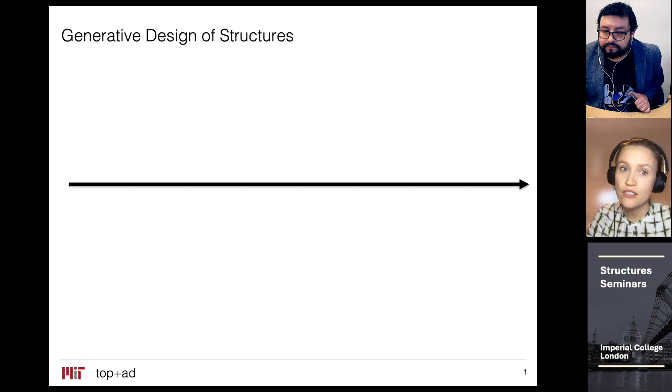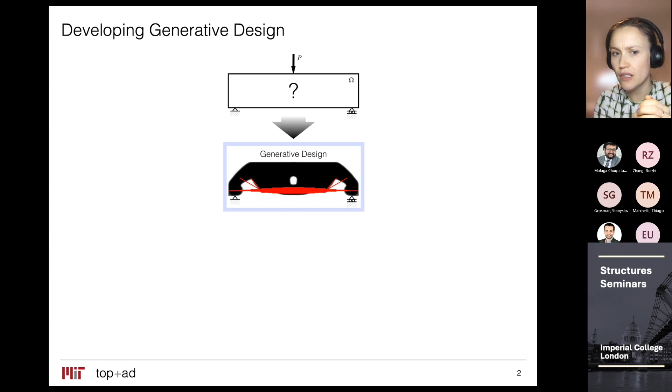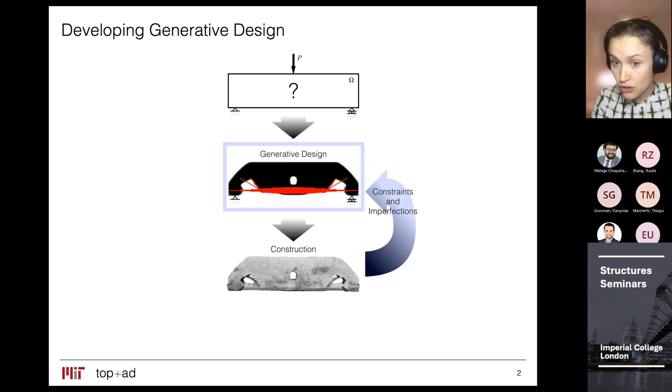In order for this really to work, the blue box needs to know what happens when we take the design out of the computer. So what are the constraints and imperfections that arise when we are fabricating or constructing our structures? Is the generative design algorithm aware of it? If not, then we need to make it aware of it. And likewise, when we test our structures, what are the governing physical behaviors that we observe, and were these captured properly by the design framework?

So this is an overview of everything we do, and totally a spoiler for the rest of the talk, because this is the stuff I'm going to be talking about. But before I dive super deep into what I mean by generative design, and all the stuff that we put into this blue box, I'd like to take a step back and talk a little bit about structural optimization, because that's what we in our group use as the driver in this blue box.

So let's pretend that we're all structural engineers and that we've been tasked with building a new building. Could be on the Imperial campus, could be on MIT campus - there's lots of building going on there for sure. And we don't want this building to be the heaviest building to ever see the light of day. We'd like to optimize it a little bit.

There are a couple of ways we could go around doing that. The first way would be to use what's called informal optimization, which means that we use our past experience, some rules of thumb, and maybe some heuristic guidelines. All of this sort of lets our design decisions be guided towards something that is better than where we started. Alternatively, we can use a formal optimization technique, where we'll pose our design problem as a formal mathematical optimization problem, and use rigorous mathematical optimizers to solve it.

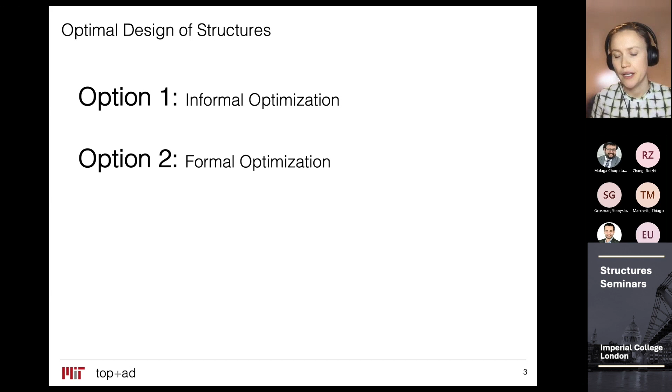If we decide to go with option 2, then we'll have three categories to pick from, being sizing, shape, and topology optimization.

I'm going to be talking mostly today about topology optimization, but before I do that, I'll just touch on what these three things are and how they relate to each other.

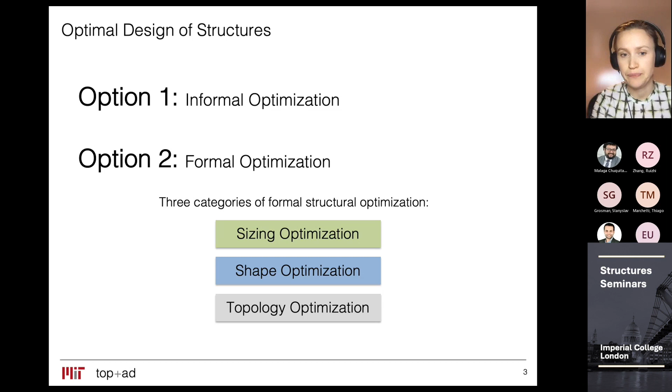So for our new building on Imperial campus, we've chosen that the girders have to be made by these truss beams, and we'd like to use sizing optimization to help us design these beams. What we'll do is choose a connectivity, put that into the computer, and the optimizer will optimize the areas of the truss and give us our design. What the optimizer cannot do for us is tell us where it's best to start.

And as you are probably all aware from the case of trusses, there are many good places to start. To figure out what is going to be the best truss for our application, we would have to try out all these different starting points.

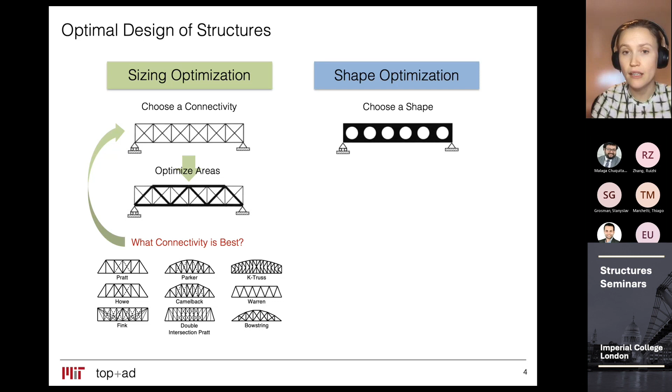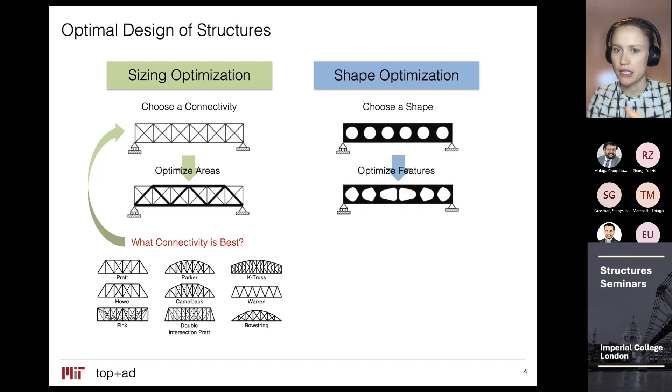And shape optimization is similar. If we were to make a low weight beam by punching some sort of shaped holes in it instead, we could choose a shape, optimize the features, so make the holes in different shapes. But what shape optimization cannot do is tell us what number of holes is the best one to start with. It cannot add a 7th hole, even if that is what makes all the difference in the world. And it can't add lots of holes either.

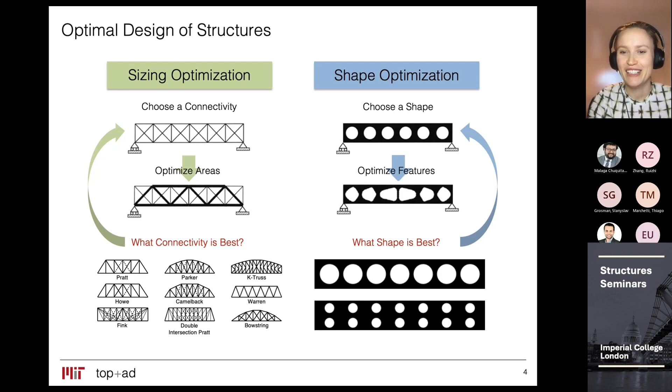Topology optimization is different in that it does not rely on this starting guess, this starting intuition of where I'm going. All you really need to know is the boundary conditions and the loads applied on your structure. Then you give this to the optimizer and ask it, where do I place material? And out comes this new design.

Topology optimization has been quite popular in the automotive and aerospace industries because it's known to lead to new and perhaps surprising design solutions that often outperform conventional low-weight design quite significantly. So in this case here, we can get a 42% stiffer beam with the same weight.

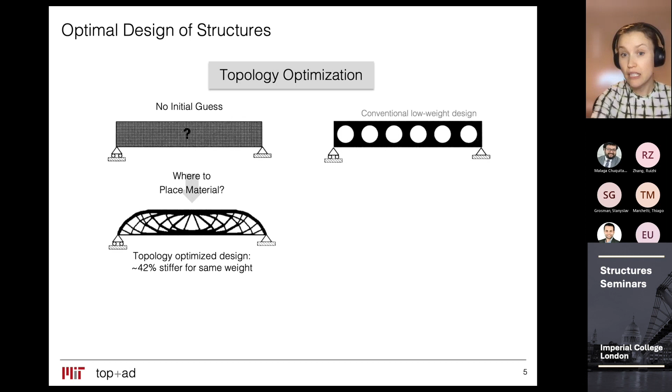And if we were to ask the question differently, how low can we go? We can get an almost 50% lighter beam with the same elastic stiffness. I don't know if this is a lunchtime seminar, but there is no such thing as a free lunch, and not in this case either.

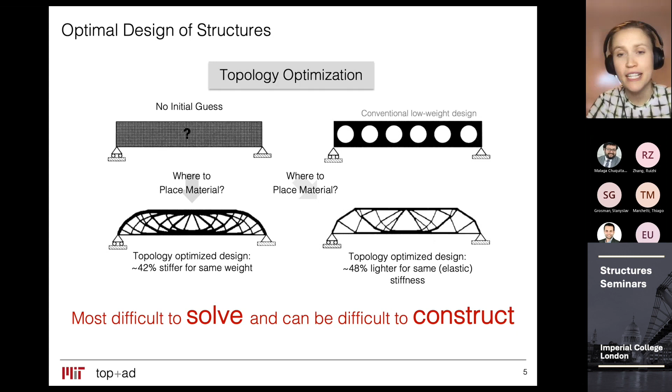This is by far the most difficult category of structural optimization to solve. And we are left with these great looking fancy structures, but also the head scratching question of how do we actually fabricate or construct them. I'll talk a lot more about that.

But before I dive into the headaches, I'll just give you a little bit of a flavor of how topology optimization works.

So we're going to be designing this cantilever beam where we have a point load at the mid of the end of the span. It has some dimensions, a height and a length. And we're going to set up the design problem as this formal mathematical optimization problem, where we are going to be minimizing the structural compliance, which in this case is equivalent to maximizing the stiffness.

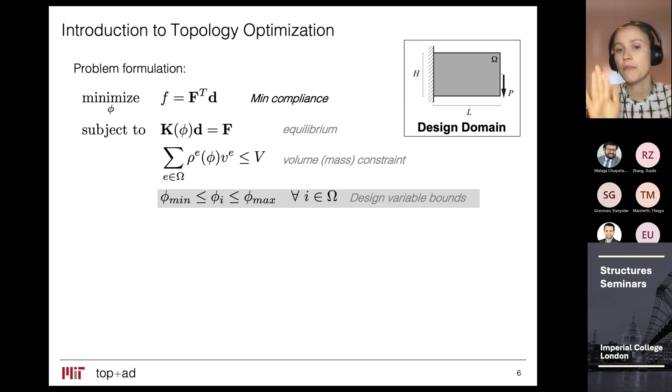We're going to be enforcing a structural equilibrium. You may recall this equation from your finite element analysis. And we're going to impose a volume or a mass constraint, so we're going to tell the computer how much material can you use. And then we have to set some bounds on what the design variable values can be.

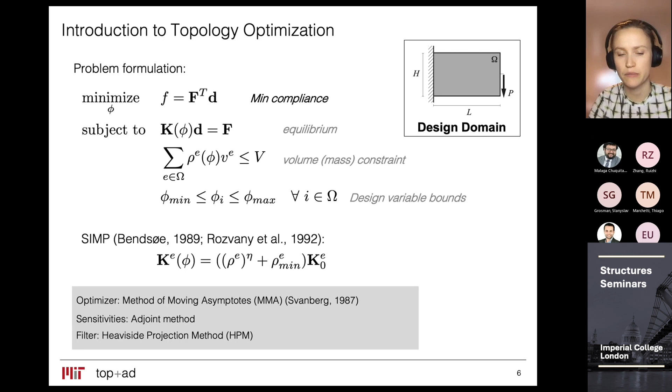Just some algorithmic details, don't worry if you don't appreciate them. We're using SIMP to penalize intermediate densities. We're using the method of moving asymptotes in most of what I'm going to be talking about today as the gradient-based optimizer. We're calculating sensitivities using the adjoint method. And then you have to do some filtering to avoid numerical instabilities. We're using the Heaviside projection method. This is something I'm going to be talking a bit more about later on.

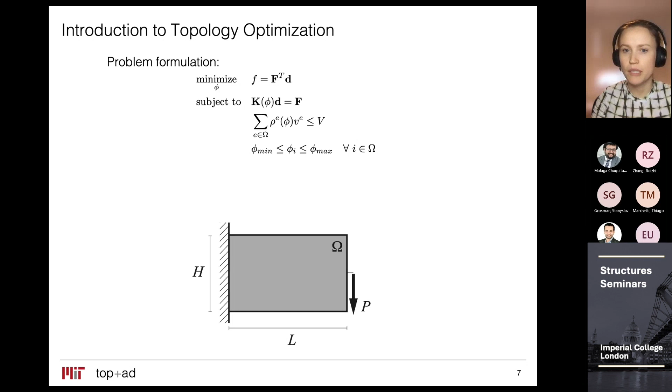With that all squared off, what we're going to see now is how a design evolves from this gray, like I don't really have a clue of what I'm doing, material solution to a discrete 0-1 material or not material design. And this happens as the design is generated.

Now, in setting up this problem, I'd made one more engineering decision. I had decided that this particular design would be well represented by 2D continuum elements. I could have picked something else.

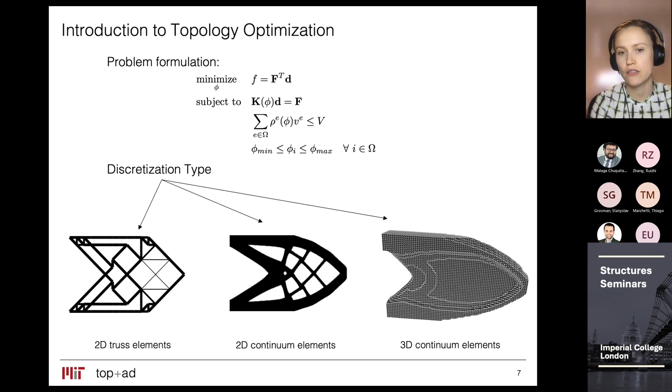I could have said that a truss discretization would be more suitable, or 3D continuum elements was really relevant to my design. I think you can see that I'm getting structures that look sort of similar, but are confined to whatever resolution I'm giving the computer to work with. The methodology and everything that goes on in between is largely the same. This is like a user specification that you put on when you set up your problem.

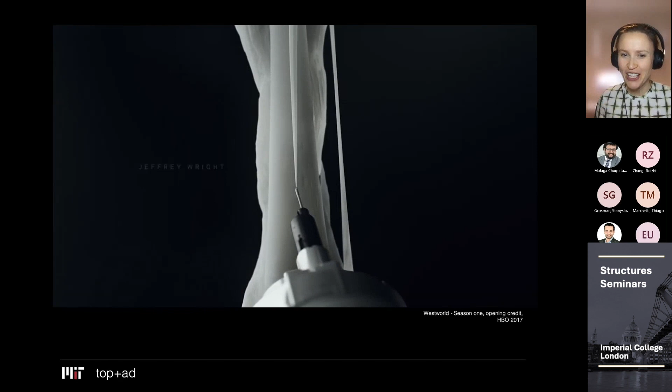So why am I boring you with all this? Why am I so keen about using this fancy generative design method when I've already said that making stuff is going to be a headache? I realized that using this clip already is dated. What I'm showing to illustrate...

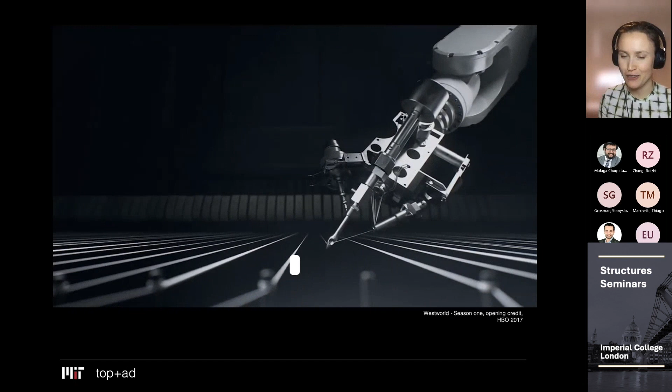...that things are really moving in the manufacturing industry is this opening credit from the HBO science fiction series Westworld. And in this opening credit, robotic extrusion is being used to print humanoid robots.

Now that is still science fiction, but this here is what's going on in research labs across the world today. Robotic spatial extrusion is being used to print. All of these examples are plastic structures. There are actually also steel examples now. One thing you'll notice in all of these images is that a lot of the designs are based on having this regular lattice that is then morphed to create an organic looking chair or structure.

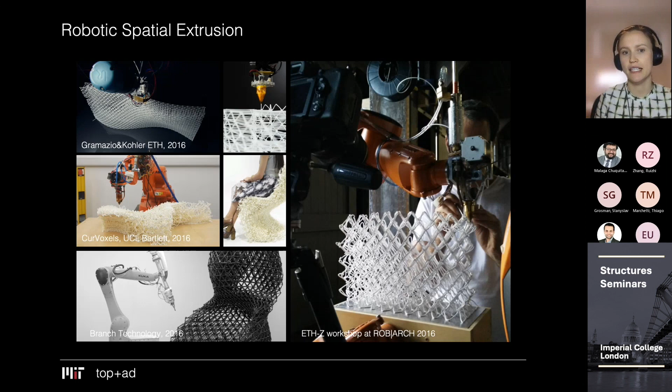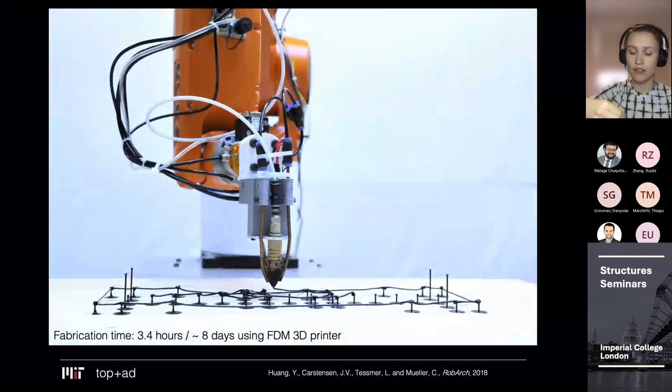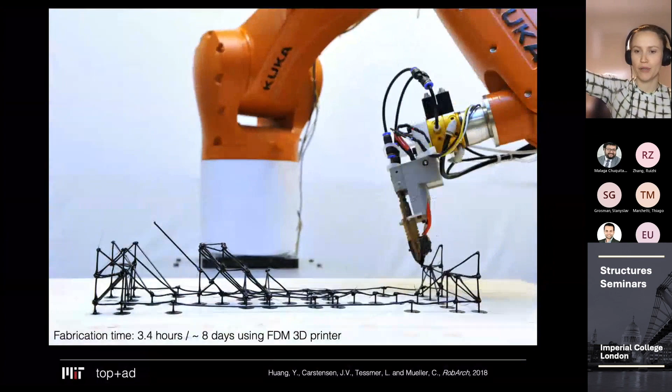What we thought, in collaboration with Digital Structures at MIT, was: how about if we create a design framework that is actually tailored to the constraints and possibilities afforded by robotic spatial extrusion? Some of the constraints of this manufacturing process are that the nozzle can't go in a million times and print from one node, because then it's going to destroy what it's already made. As you can see, it can print free form, but it can't do so forever, because then it's going to start sagging. So we designed a truss topology optimization framework that had some of these constraints embedded.

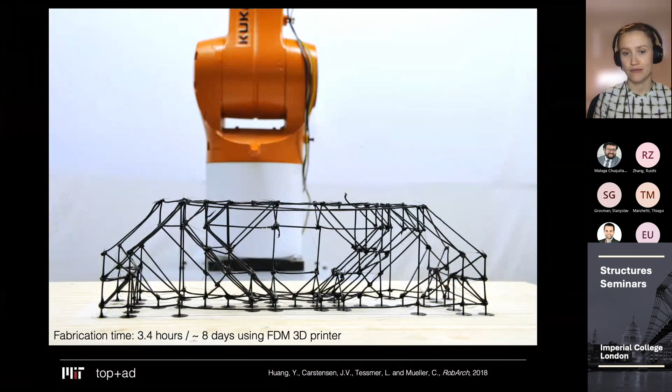And we were able to create designs that are tailored to this new way of making. The design I'm showing here is a beam bridge that's like 2 feet, so like this big. We were meant to test it, but then COVID happened, and now it's just sitting in my colleague's office.

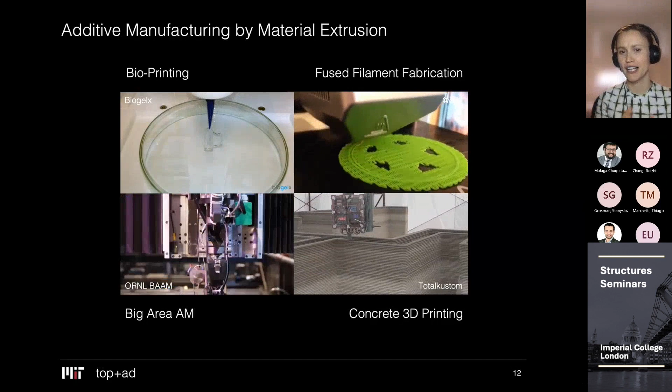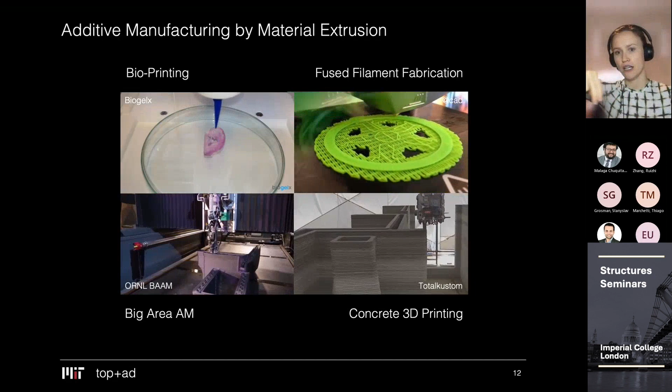Maybe one day. We also work with more conventional 3D printing technologies. So one technology that's really common across a wide array of 3D printing methods is what's called material extrusion processes, where you have a nozzle that moves across a 2D slice of that domain and then spits out material as it goes along.

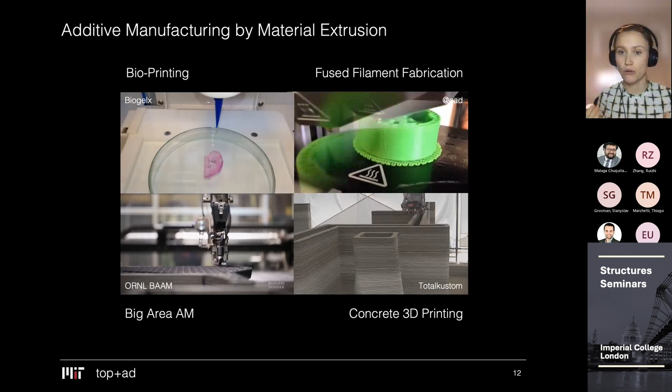And this is used at small scale in what's called bioprinting. You've probably all seen a fused filament printer or FDM printer in action, either in a library or in a mall or something like that. But this way of printing is also used way up at the large scale for what's called big area manufacturing, or in concrete 3D printing.

We're not the first people to be interested in the intersection of topology optimized design, specifically for extrusion printing technologies. But most of the previous work has focused at the scale where the nozzle is so small that you can really create any thickness you want.

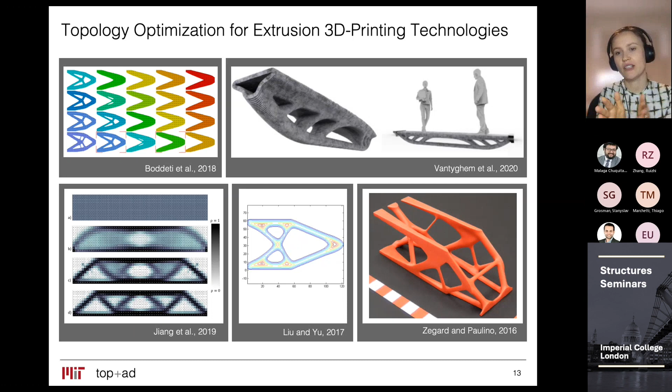We were interested in looking more at the large scale, where if you have a design and you can force it to be relatively simple, your nozzle can only pass a discrete number of times, and so you can make a member that's 1 width thick, or it can be 2 widths thick, but it can't be something in between.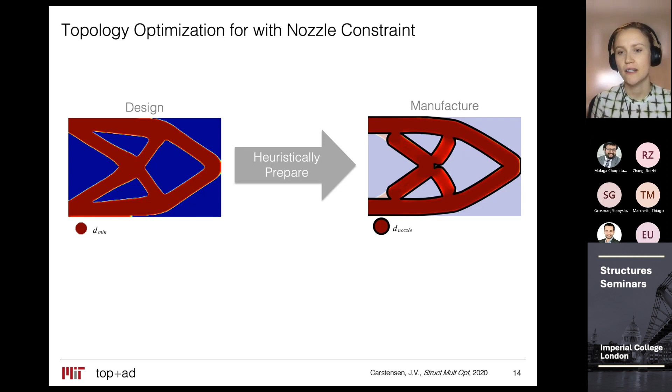Even if your design is relatively simple, right now you have to go in and prepare it heuristically to fit this discrete nozzle pass constraint. And what we really were interested in doing is moving away from that and instead create designs that are directly ready for printing.

We took the basis of this in the filter that I mentioned a bit previously. In topology optimization, you get a lot of numerical noise if you don't filter, so it's very common practice to use a filtering approach. We wanted to take advantage of the fact that you do this anyway, to implicitly enforce the manufacturability with regards to extrusion printing. So we used a filter called a discrete object projection, which is based on the Heaviside method.

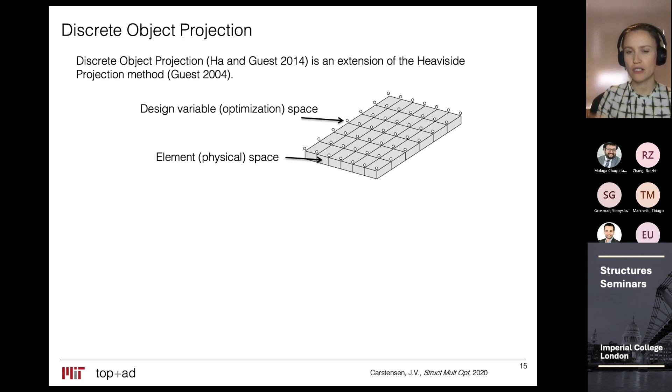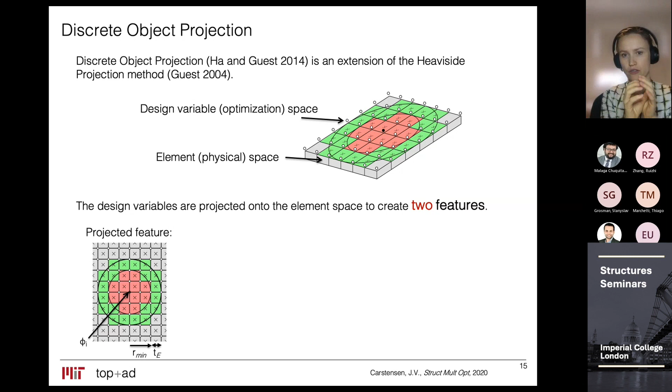You can think of it as if you have a design variable saying go, then it's like beaming down material from space onto the earth and then creating features. In the case of discrete object projection, a filter will create two features: a circular feature that's enclosed by a concentric ring. Classically, it's used to put reinforcement or stiff inclusions into a compliant phase.

You could, for example, use this to design reinforced concrete sections where you place the reinforcement bars.

We wanted to use it differently because we wanted to use it to mimic how this nozzle moves across the domain, and we made some assumptions about how that works. So we said that when a nozzle deposits material, it's really creating two distinct regions: one red region where you're not allowed to overlap with an adjacent pass, and on each side a thin overlapping region where you're allowed to get close enough to something that's deposited later on.

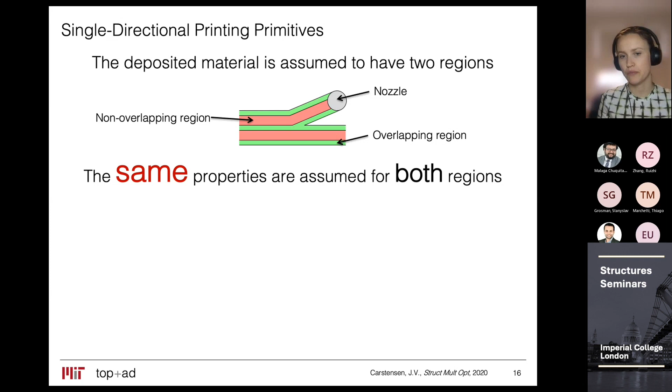Initially, we assumed that these two regions had the same material properties, and we changed this filter to mimic that you'd have this core region where you don't bond, and then these thin bonding regions, showing two different directions here for the nozzle either moving horizontally or vertically.

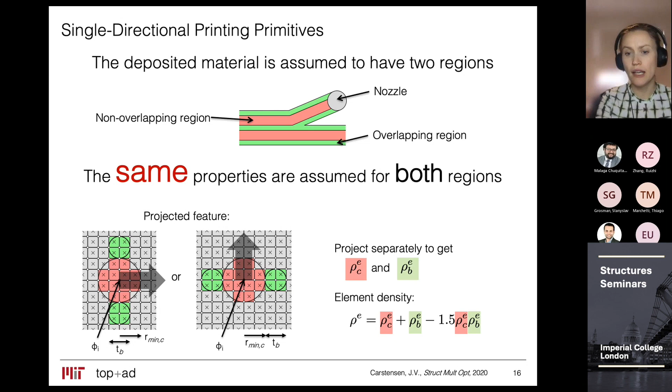Mathematically, what you do is really filter twice, one for the red and one for the green part, and then combine that to give a stiffness of the elements in your grid. Then you just use regular topology optimization for the rest.

Because it's a little bit limiting to imagine that a nozzle only prints in one direction or only prints in another direction, we added this additional design variable that determines the rotation of the nozzle. So a design variable saying go will either be printing horizontally or vertically, depending on the magnitude of these orange design variables. That means you make three filtering operations and combine it, but it's very similar to the case before.

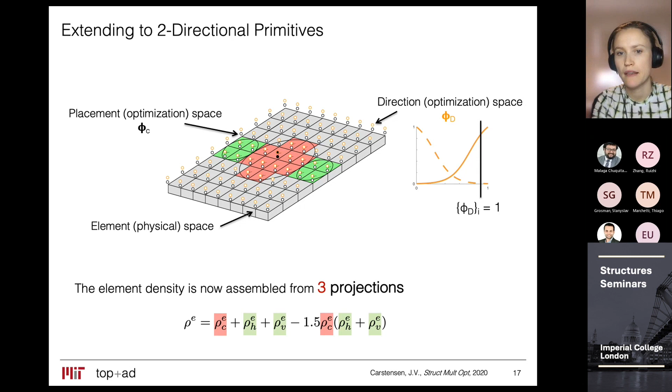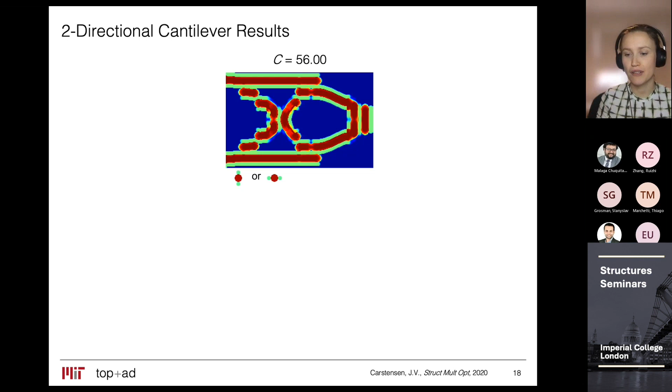This here is the result that we got for the cantilever beam, and as you can see, we're really happy. It fulfills this nozzle constraint. Nothing is overlapping, everything is within these nozzle passes, and it comes with these two design variable distributions.

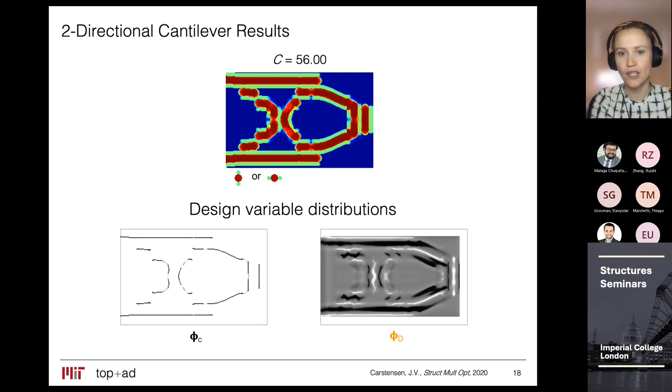Of course, we compared this to our less fancy results. We were minimizing the compliance, so a low C is good in this context.

If we first compare our new design to the design on the lower left that does not have constraints on it, we see that we're losing a little bit, which is not surprising. If you ask more of the computer, like to fulfill more constraints, you're going to sacrifice a little bit on compliance. That makes sense. But what we also see is that even in this case where the post-processing or preparation for manufacture was really simple, we're actually still doing better.

And you can just imagine how maybe some structures are not that easy to interpret or may not so easily be prepared for manufacture, how much more this effect may be magnified.

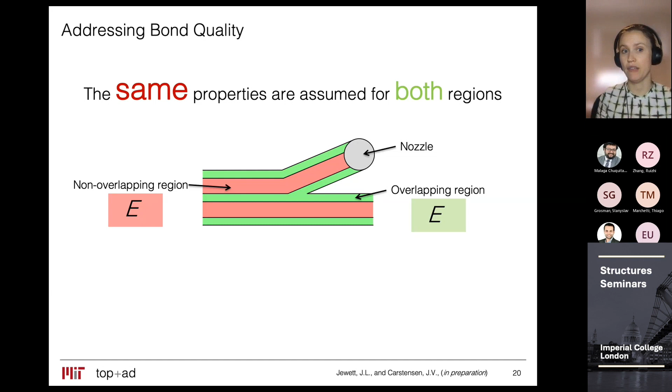We're continuing to work in this direction. Some of the work we're doing now is revisiting this assumption of the two regions having the same properties, and saying actually, we want to be able to assign different properties to the two regions to mimic that if you stack things or layer things, this transition zone is going to be weaker.

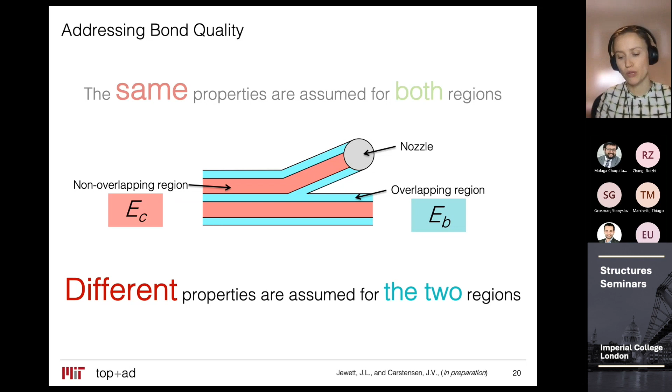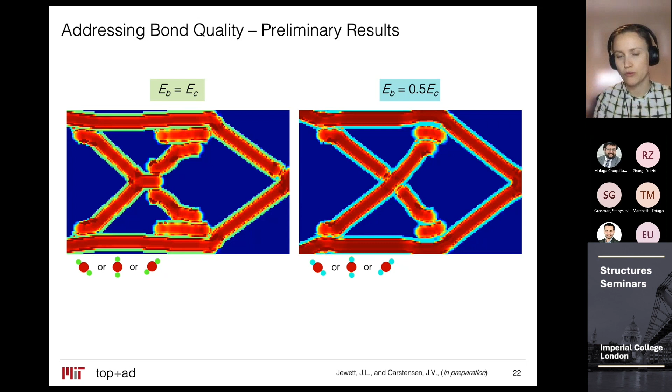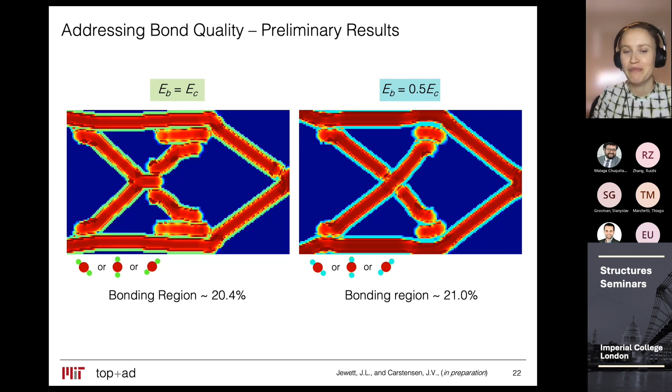There's less stacking going on in the blue version of the design. Actually, the amount of bonding material placed is a little bit bigger in the blue design. Not a lot, but a little bit, but it's placed more smartly.

And the reason I feel confident saying that is because we tried to compare the two designs. We couldn't just compare them as they came out, because that's not really a fair comparison—they don't have the same material properties.

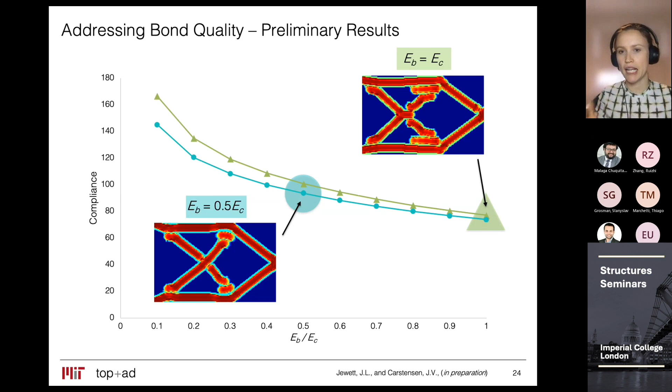So we did a sweep. We analyzed the two designs with varying degrees of stiffness in the bonding regions. And what we could see was that the design obtained with a lower stiffness in the bonding region outperforms our stiff design in all cases that we tested.

It's not necessarily true for all obtained designs, but it's a clear trend we have seen in what we're working with.

So now I've talked quite a lot about topology optimization specific things—how you can tailor topology optimization to the design of structures that are made in a particular way, mainly with 3D printing. But since this is a structures seminar, I really want to talk a bit about topology optimization for civil structures and how there are plenty of opportunities in that space as well.

Because manufacturing is also advancing in the civil structure space. And it's not just advancing by creating new 3D printing technologies, it's also advancing by more digital ways of CNC carving, of making formwork, etc.

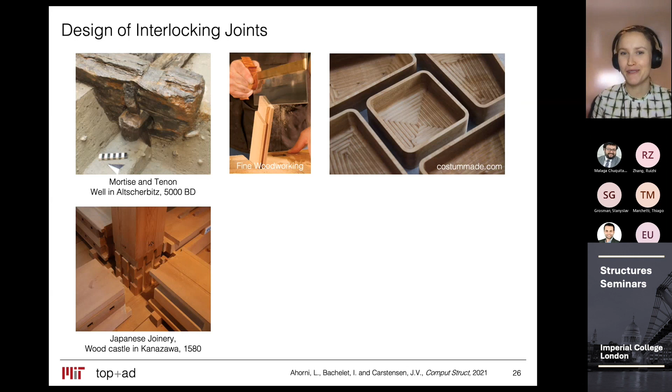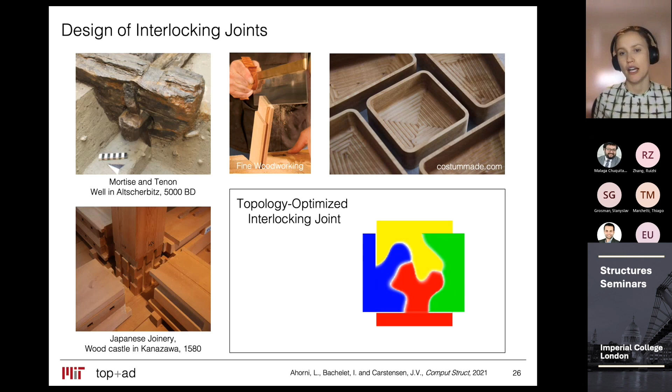I'm not that great at a saw and a chisel, but I know how to operate a CNC carver. And that has really opened a realm of possibilities of what sort of shapes are available for making joints that come together and lock each other, and can potentially even be disassembled again.

I alluded a little bit to this before we started, but in the global context that we are in currently, I think we as an industry, a civil engineering industry, have to start living up to our responsibility in terms of the global CO2 emissions produced by our sector.

One way that we can estimate, if we're going to be making a new structure, how much will be the embodied carbon impact, is through the global warming potential of the structure. And this is actually quite simple to calculate.

You just go through all the elements in your structure, get the weight of the element, and then multiply it by the embodied carbon coefficient of the material it's going to be made of. Once you've gone around your whole structure and summed everything up, you have this global warming potential.

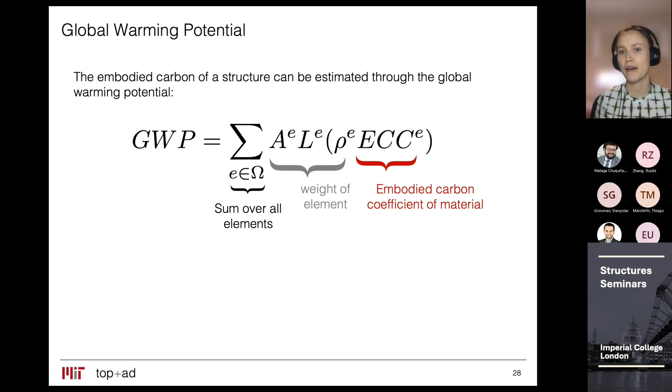So if we want to be cautious of how much material we're using, or how much we're impacting the planet when we're building, and if we're just building with one material, it's actually really simple, because then we can just worry about the weight, and minimizing the weight also minimizes the global warming potential.

But if we have a structure that has more than one material, and these materials have very distinct embodied carbon coefficients, then it's not that simple—it's not necessarily just minimizing the weight of everything.

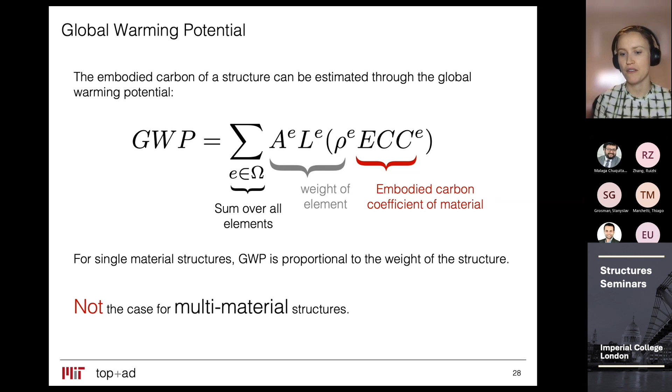To illustrate that, we've worked on a timber-steel truss framework where we looked at minimizing the embodied carbon. This picture here is from the University of Massachusetts Amherst, their design building, which is one of the first mass timber buildings in the US.

We started out by looking to literature, and we found there was surprisingly little optimization of multi-material trusses, and specifically topology optimization of multi-material trusses.

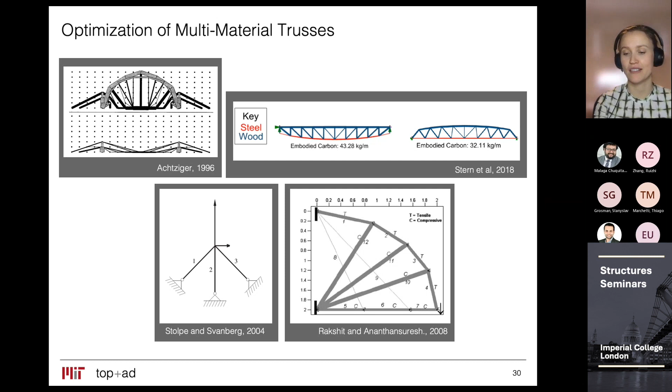When you do truss topology optimization, you often start with a ground structure where you have a lot of potential elements, and then in classic truss topology optimization, you size each of these elements and let the area of some of them go to zero, which leaves you with your truss structure.

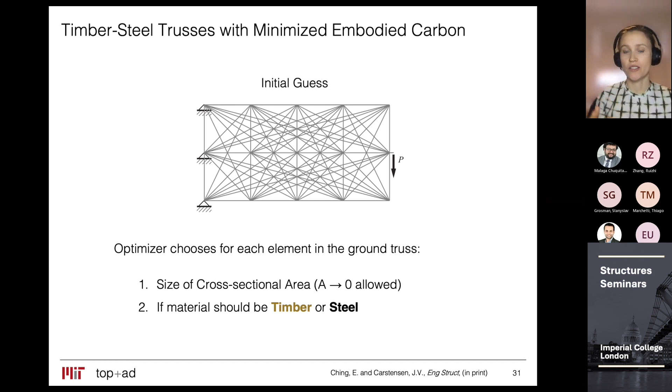What we wanted to do was add this decision variable that says, in addition to figuring out how big it has to be, you also have to determine if it should be timber or steel.

That gave us a problem formulation initially that looks like this. We again maximize the stiffness subject to an equilibrium constraint. We have some bounds on the design variables and a volume constraint, actually a weight constraint or a global warming constraint. We tried with the two to compare.

This X variable picks if I'm putting material 1, which is timber, if it's 0, or material 2, which is steel, when X is 1. To determine the properties between the two, we used SIMP functions that we know from continuum topology optimization.

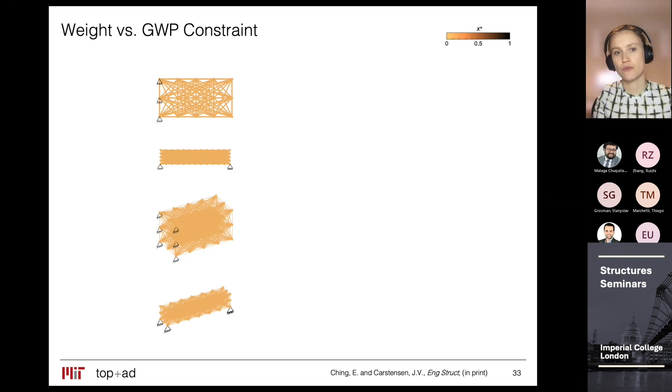So these are the ground structures we started with in 2D and in 3D. At first we employed a weight constraint, and we got these all steel structures.

We switched out the weight constraint with a global warming potential constraint, and we got almost the same all timber structures. The student who was working on this was like, this is a bummer.

But then we looked at it, and it's a good thing, because steel is about 30% stiffer per kilogram weight. So if you want to create a stiff structure and you're worried about weight, then steel is the material to use. On the other hand, timber is about 160% stiffer per kilogram CO2.

So if you want a stiff structure that has a lower global warming potential, then you want it to be all timber. It's going to be heavier, but you want it to be all timber.

This is sort of idealizing the materials and not worrying about some relevant constraints.

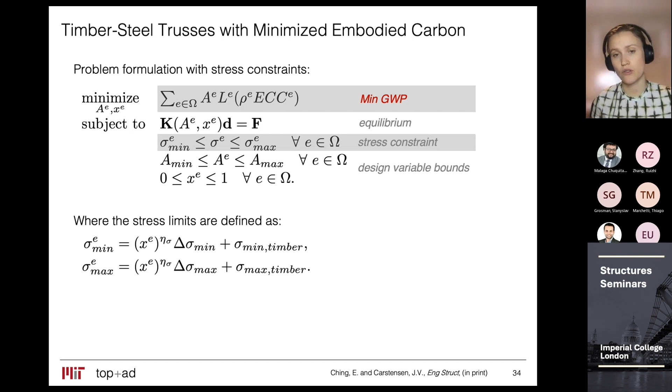So we wanted to elaborate on it further and decided to aim directly for minimizing the global warming potential and employ some stress constraints, where these stress constraints of course differ. There's one set of constraints relevant to steel, and one set more relevant to timber. So we had to be able to formulate the constraints so that they could vary with the X parameter.

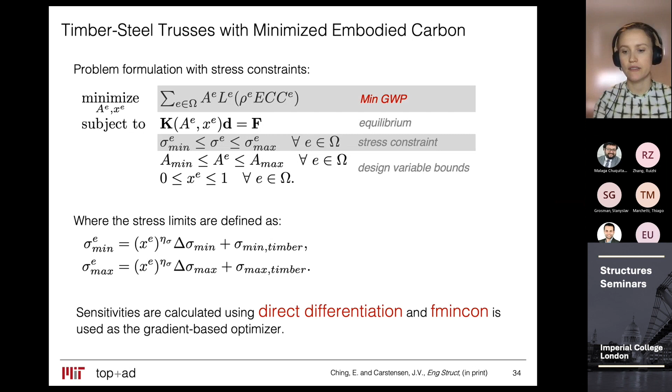I want to say this is one of the only times that we're not using MMA, but we're using the FMINCON optimizer in MATLAB, and we're calculating the sensitivities using direct differentiation.

This is not quite an apples to apples comparison. I don't think it's fair, because we're not really including buckling, which would be a bigger problem for steel than for timber in compression. So I think if you were to design it for real use, the actual gains would be even bigger.

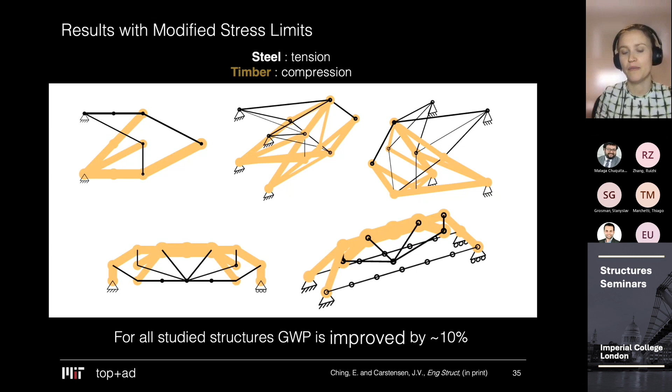I want to move to talk a bit about topology optimized design for the biggest sinner of them all in terms of construction material, which is reinforced concrete. And this is going to be the last topic that I'll touch on.

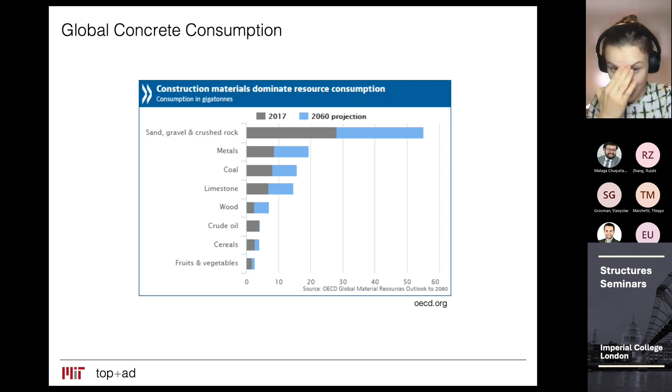So when I say that concrete is the biggest sinner of them all, I think partly of this plot here that shows what the OECD estimated was the construction materials used globally in 2017 and what they think is going to be used in 2060.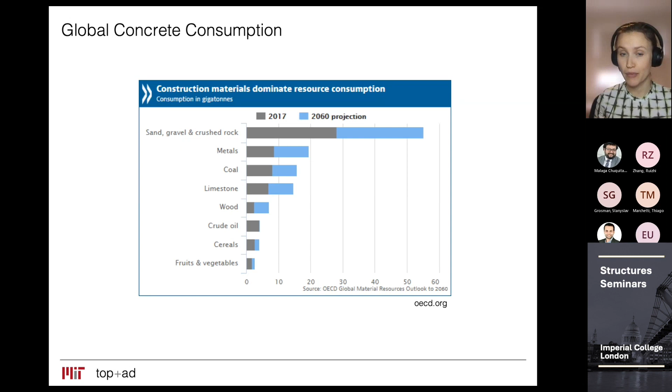On the top of this chart, we have sand, gravel, and crushed rocks, which are all the ingredients you need to make concrete. Why this is problematic is because cement, the glue, has a very high CO2 impact. It's estimated that the global annual contributions of cement alone is about 8% of global emissions.

While of course there should be research on creating green cement, we just wanted to ask the question: until we get to that point, can design contribute? Can we just use less concrete in reinforced concrete structures and design our way into structures that do the same as what we accept today, but have a lower impact by virtue of having less concrete?

We started this work by looking at the literature and recognizing that you could do rather fancy things computationally. There are very few examples of things that have actually been constructed. There were, in 2017, no examples of experimental validation. So we thought we'd start there.

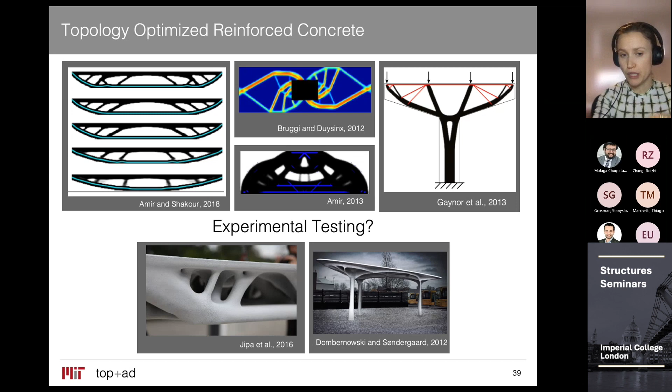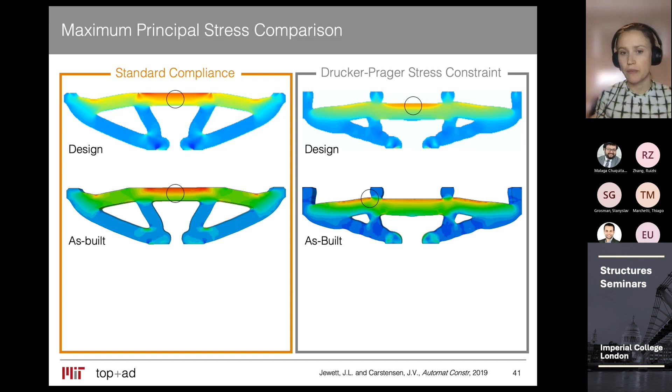We started by looking at plain concrete beams that we cast into CNC milled formwork. We tested our beams and found that the modifications we had to make in order to manufacture them were, in some cases, very detrimental, building back on what I talked about earlier about how important it is to capture the constraints and imperfections associated with manufacturing.

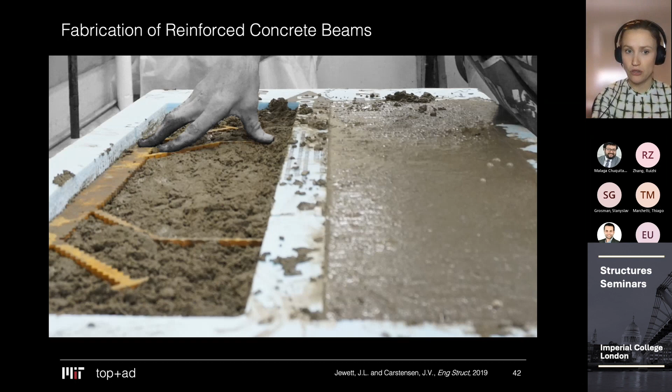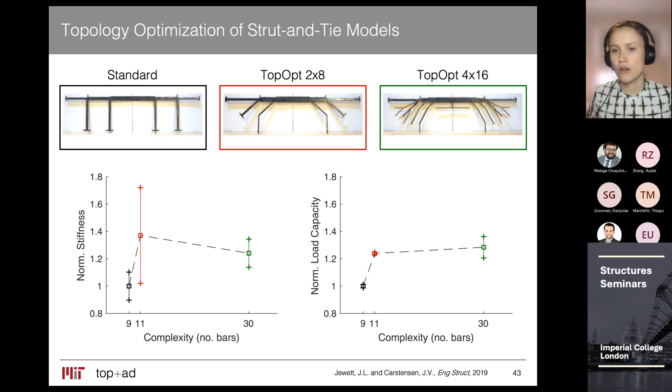We then looked at reinforcement, designing strut and tie layouts that we laid into prismatic beams. One encouraging finding was that complexity doesn't actually add anything. When we compared a standard by-hand design to a topology optimized design with varying levels of complexity, we saw that in terms of stiffness, topology optimization gives us a boost, but going complex doesn't give more than that. This was even clearer when we looked at normalized load capacity: topology optimization adds about 20%, but you don't have to go complex, because that doesn't necessarily give you anything beyond that.

An interesting thing about these models is that when they come out of the computer, they look like this. They have black regions showing the force flow in the concrete, and red showing the steel layout. But when you actually make it, you just make a prismatic beam anyway, even though the white regions in the computational model aren't really contributing or carrying load. So our question was: can we just not put material there?

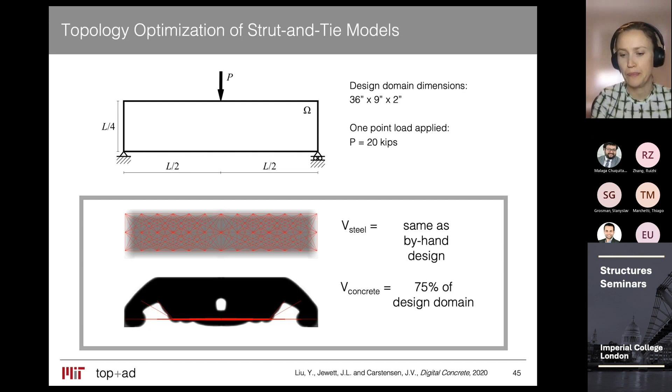We looked at a simply supported beam, and we knew there would be some obvious problems, like steel coming in and connecting at one node with concrete — that's not going to work physically. So to avoid the most obvious problems, we decided to try to remove 25% and see if that was possible. That gave us a design that looked like this.

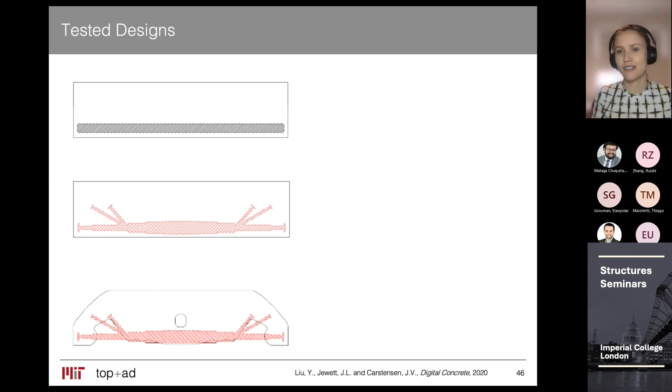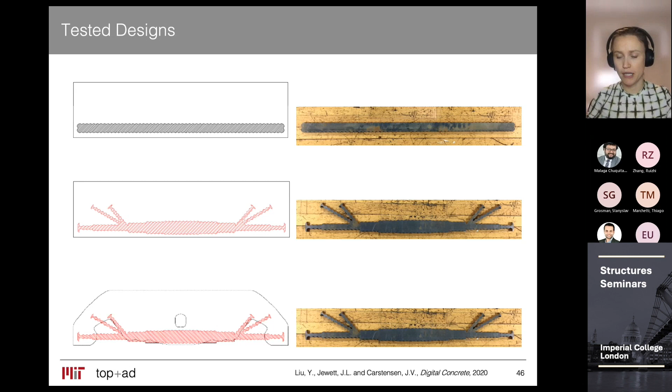We compared it to a design we created by hand, and a design as it's meant to be — with 100% concrete in a prismatic beam — and then the reduced concrete design. We don't have a massive lab, so we water jet cut the reinforcement from steel plates to make prototype sizes. We cast them into the beams, giving us three different beams to compare.

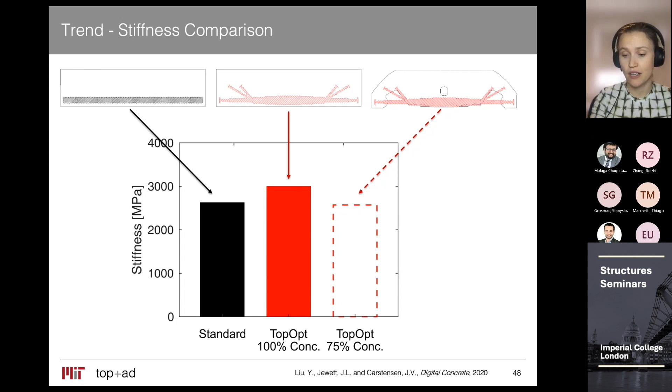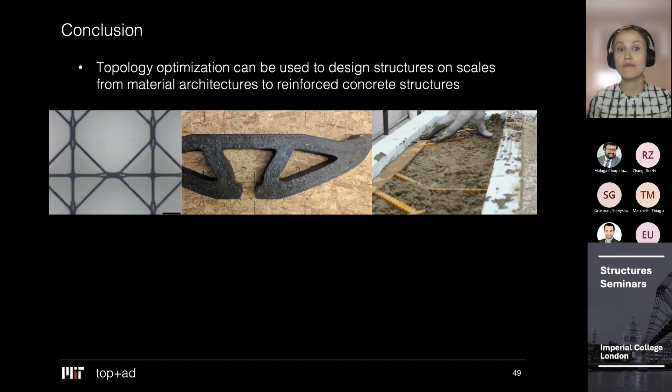With this, I want to wrap up. I hope I've convinced you that topology optimization can be used to design structures on scales ranging from material architectures up to reinforced concrete structures.

I've also tried to convey that post-processing should, as much as possible, be avoided, and constraints should instead be embedded into the design framework to limit the need for errors that incur as you translate your design from the computer out to the real world.

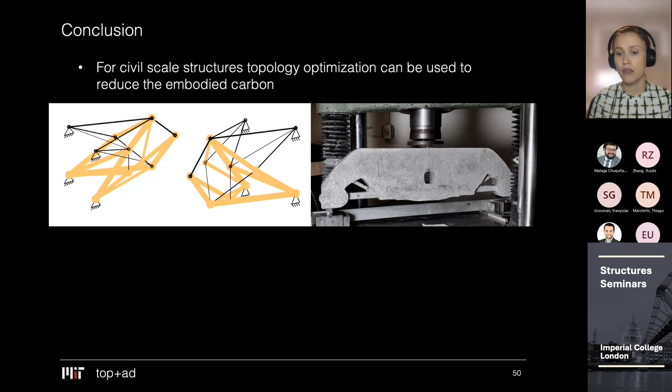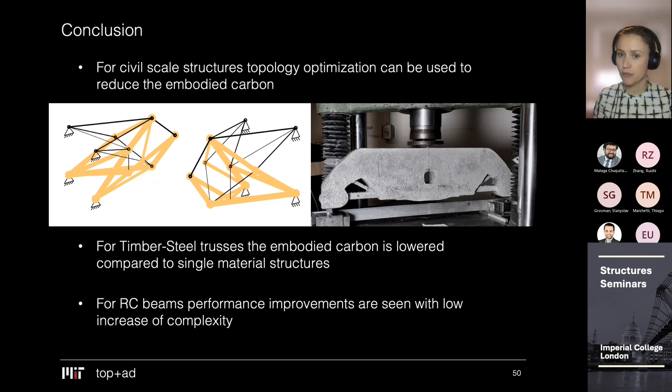For civil scale structures, topology optimization can also be used in various ways to reduce embodied carbon. We've seen that for timber-steel trusses, we get lower embodied carbon compared to single material structures. And for reinforced concrete, what's very encouraging is that we don't need to go highly complex in order to get performance improvements. When I say 'we,' I mean myself and my collaborators: Ernest Ching, Jan Louis, Jackson Jewett, Leora Honey, Yiyang Huang, and Caitlin Mueller from Digital Structures.